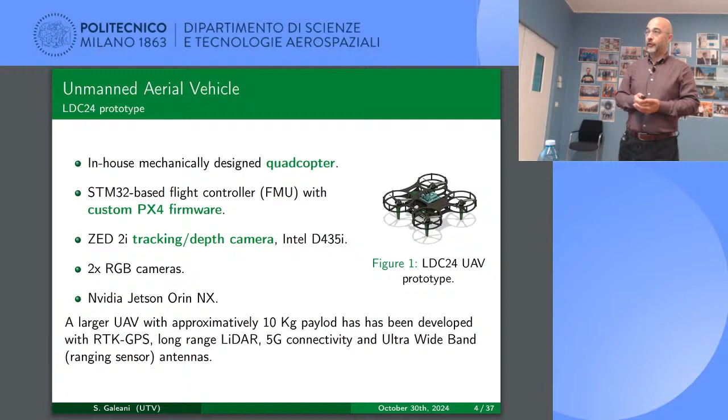One of the big works they've been doing is constructing a distributed architecture - distributed from a software engineering point of view, having several different software agents dealing with stuff, communicating asynchronously with heterogeneous hardware platforms. Part of the work was not just to have this work on a specific set of platforms, but to make it as replicable and modifiable as possible according to your need - the idea of having Docker containers so things were pluggable and unpluggable easily and replicable from machine to machine.

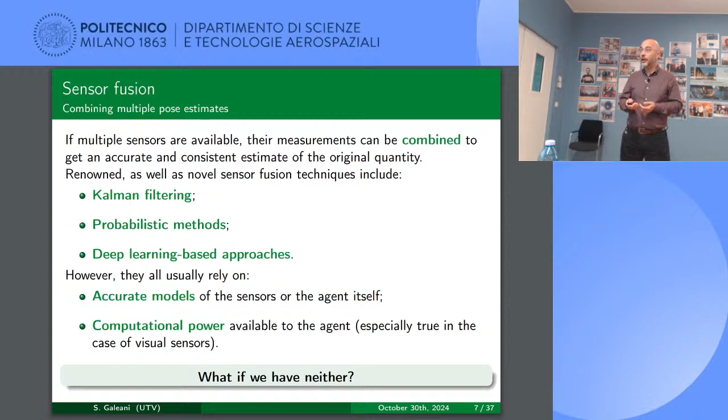And this is especially true in the case of visual sensors, where we have to look for features in the environment, try to combine them, try to contact other agents and see if they see the same features, how to combine the two scenes. So the idea was to work on this hypothesis and try to say what can we do if we don't have this information, or we don't have a reliable version of that information.

So this is one of the algorithms, and I will try to get into the assumptions and the algorithm that they have been using to combine these things. So they are assuming essentially that we have discrete time measures, because we have limited communication, we have visual sensors, for example, that have a low sampling rate because we have to take this image, elaborate the image, and so on. They are assuming to have a certain number of different sensors that we will call S_i.

There is a coordination assumption about the sampling periods, so they are assuming that there is a common sampling period for all sensors, and they are essentially coordinated. So this is one of the versions of the algorithm.

And so for each one of the sensors, they are assuming that there is some measurement done of position, essentially. So at discrete time k, we have a position for sensor i characterized by its position in the x and y coordinates. And we have another piece of information, an on-off value, essentially a small s_i,k. This is telling us if this specific sensor is working or not at time k.

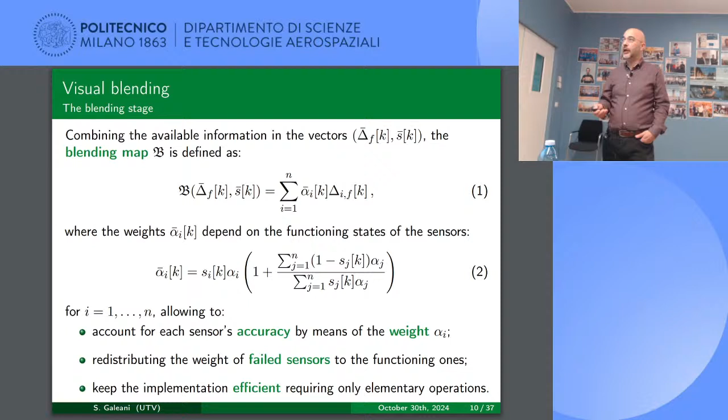So actually in here we have these weights alpha I, which are parameters that can be tuned to account for different things happening. They have an effect on accuracy, so we can change those alpha I to replace one sensor that has failed, giving more importance to the functioning ones. The operations required to compute this are essentially quite basic, so they can be done efficiently on the available hardware.

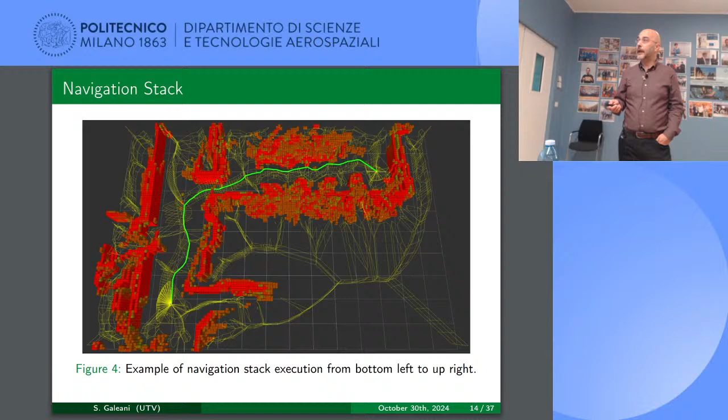The second topic I will talk about is essentially a very punctual thing, just an example of things that have been done, considering that drones are typically affected by several nonlinearities and uncertainty, and we are only able to measure some quantities, not everything described in the drone. Maybe we have a wonderful control law, but we don't have available measurements of all the state variables we need to implement it. So the idea is to try to build an easy estimate of the uncertainty and of the variables of interest. This is also some published work, where the idea is to combine high-gain observers using sample measurements, because that's what we have in a similar scenario, and using interval arithmetic as an additional tool to have a simplified design and to capture the uncertainties on the system.

The basic setting is quite classic: essentially a nonlinear system in observability canonical form, which we assume holds globally. We will see on an example that you can run this algorithm on something that doesn't respect this hypothesis and still get useful information. We have the state xi, this is our system. Phi is essentially subsuming all the nonlinearities, which depends both on state and input. We have, in this case, a scalar input and a scalar output, which is the first output in this chain of integrators. That is the linear part, and then you have the nonlinear part acting on the last state.

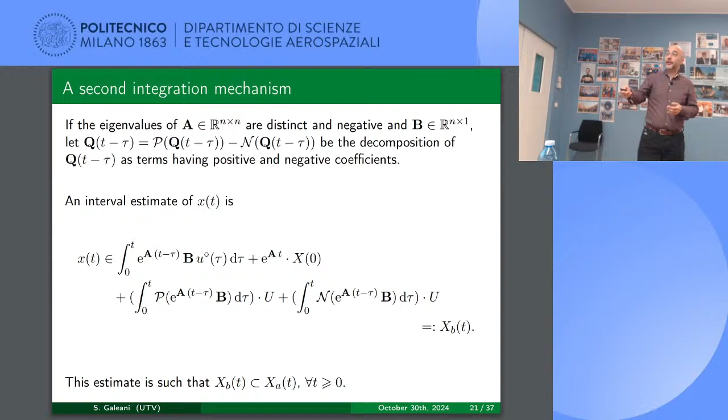And by doing this, you don't have the problem related to the slanting due to the change of variables. This actually gives you an estimate called XB, which is better than the interval estimate you had before. So at least I can finish this and show you one picture, then say one word to conclude.

So how do you build a high gain observer based on these ideas? The way you build the high gain observer here, if you remember, the A matrix was just a chain of integrators. So we are completely disregarding in this design the original description of the nonlinearity phi. I will just use the matrices A, B, and C.

So essentially, this is the formula. If you are familiar with Khalil's approach, the difference here is that you are not using the copy of the nonlinearity. Instead, you assume that your phi function can be bounded by an interval of some sort, and then essentially you propagate things just like this.

If you go here, you can see there is this trick I just showed you using the positive and negative part. There is the propagation of the uncertainty in the initial state, and there is the propagation of this bound on the nonlinearity.

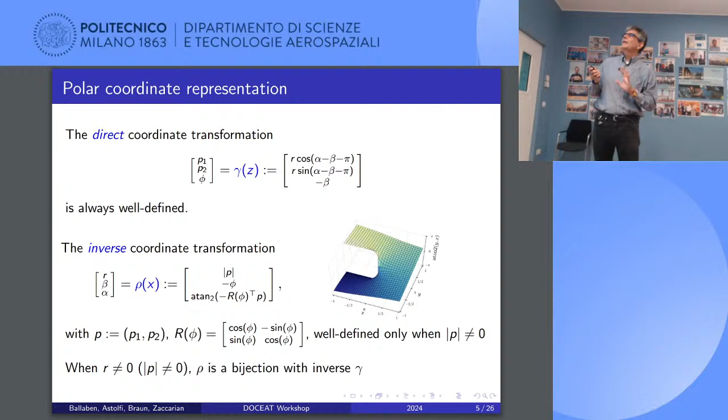So by the way, maybe I should be a bit more clear about the structure of my presentation. I'm going to have a brief introduction first, then I'm going to tell you a couple of issues that are resolved by hybrid, and then if I have time, I will discuss briefly robustness. So let me continue with the brief introduction, which is not so brief.

Okay, so one thing that I'm not going to bother you with calculations, but that you can prove, is that if you take the original dynamics, x dot equals h of x,u, you can actually prove that the derivative of this coordinate z is fairly simple as a function of z. Remember, z is r, alpha, beta, and you see the right-hand side doesn't even depend on beta. Now, I'm using a transformed input v here because it's more convenient, but it's a very simple transformation, okay?

Now, this 1 over r might scare you, but let me remind you that what that means is that if you know how to choose v, which is what's going to happen, then u is very nicely behaved because u1 will be r v1. So what that means is just that u will vanish at the origin. So it's a nice input, okay? Remember, r is the radial distance.

So you can prove all this stuff by doing some simple transformations, with this type of things. Okay, so—

So with these dynamics, I would like to emphasize that you apply Brockett's conditions, these stabilizability conditions, and they do not hold anymore. That means this system is well behaved. So if you look at these dynamics, it is a very nicely behaved system. And so you don't have all those, you know, there doesn't exist a feedback, blah, blah, blah. Actually, there exists a very nice feedback which globally asymptotically stabilizes the origin. It's smooth, it's really nice.

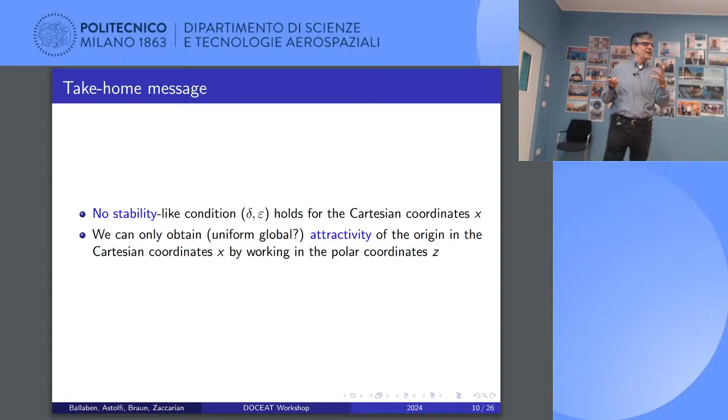Okay, very good. So again, you don't have stability on this output, right? But you do have attractivity. So how can we characterize attractivity? Let me try to explain a couple of things that will lead to hybrid. Now, before characterizing it, I want to tell you something that will lead to one extension.

So if you look at this stabilizer K of Z that I showed you, sometimes it does really stupid things. Like, for example, if this is your target and you're in front of it, what it does is it goes back and then forward and finally parks. But it would make much more sense to just go negative speed and park, right? So why is that happening? It depends on the geometry of the problem.

And so the idea is to use hybrid tools to switch between forward and reverse motion so that this is the behavior obtained from this initial condition. And that's really the big message of this hybrid thing that we do here. So how do we do that?

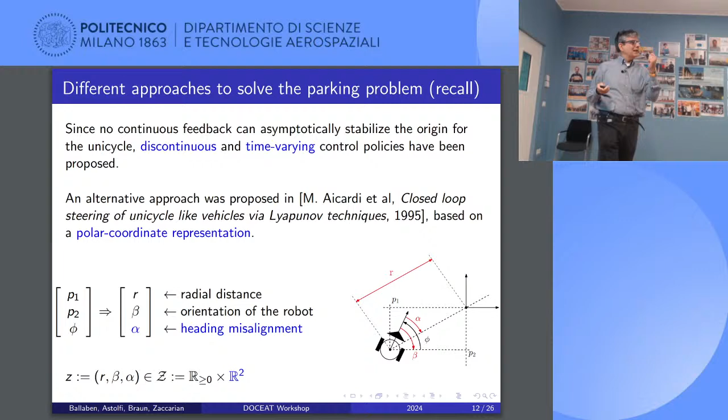Let me go back to a slide that I showed you already, when I defined this coordinate, and remind you that alpha is the heading misalignment. Now, I would like you to think about alpha as a measurement coming from a camera, okay? So imagine you have a camera in front of your robot with a certain field of view, and another camera at the back of the robot with another field of view. And imagine now you choose - there's some overlap in the field of view, okay? This is quantified by a quantity delta that I will introduce shortly.

So imagine that if the target is here, and it's in the field of view of the front camera, you may just go forward and reach this point. But if the robot is here and the target is in the field of view of the backwards camera, you will do reverse motion. So that's the whole idea, okay? And how do we do that?

Okay, so first of all, we duplicate the z coordinates. So we have the front z and the back z. R is the same for all of them, but alpha f and alpha r are slightly different. And now what we can do is redo all the calculations we did before, but with the caveat that the camera is in the back. So there's typically a pi difference in the alpha betas that you can work out pretty easily.

And the interesting thing is that the transformation you need to do from x, the one that was ugly with atan2, now becomes very nice because it involves a difference of sign. It turns out within the field of view of the camera, you completely cut out and throw away the discontinuity of atan2. So we were able to completely pull out of the picture the discontinuous part of this ugly function, and now everything is smooth relative to the domain of existence of these angles. Hopefully this will be clear in a sec.

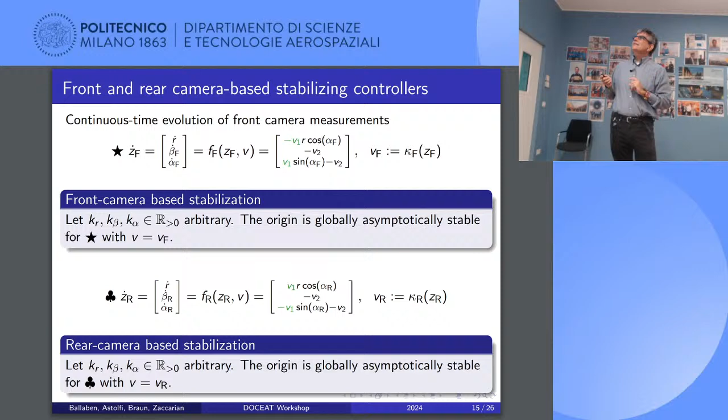Now what we can do is go beyond this and really get to the core achievement of hybrid, which is that the angles are actually limited. So the camera's angles are limited, but also the beta angle is limited, something I haven't discussed so far, and that I would like to discuss now.

You cannot choose a large angle like 100 pi - it means the robot would spin on itself uselessly. So we would really like to restrict the domain in a bounded set, for example like minus pi to pi, slightly larger. And then we will reset these angles when it is time to do so.

This is illustrated here: if you have this orientation, this is a certain beta, but it could also be 2 pi minus beta. So 2 pi jumps are essentially no jumps, but mathematically, we have to implement that.

With respect to alpha, I'll go fast here, but the rough idea is that if you have a certain camera and you reach - alpha will belong to this interval, from minus pi over 2 minus delta to plus pi over 2 plus delta, a bit more than pi over 2. And then when you reach the boundary of this set, you reset.

The way you reset is you have pi jumps when you go to the other camera. So you switch from alpha f to alpha r, front to rear, and vice versa. Does that make sense? It's a very natural jump.

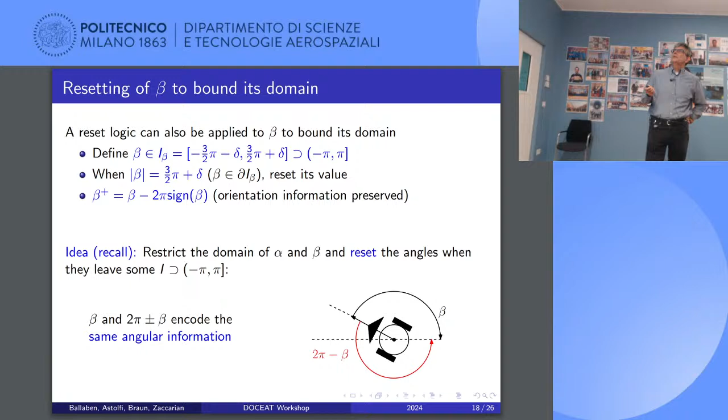It doesn't matter, you can change that, and probably there are ways to extend this. And whenever you reach this boundary, you reset beta. So let me try to put all this together.

To do that, I'm going to do what we do a lot of times with hybrid systems: we introduce a logic variable, which becomes a state. This state is either -1 or 1. 1 means we're using the front camera, -1 means we're using the rear camera.

And then we add q to the state z. But remember that now alpha and beta can be alpha front or alpha rear, depending on what q is. So everything is clean now.

And then the dynamics - it looks ugly, but it's just a collection of what I told you already. You remember the green terms where we had minus or plus v1? Well, we put q, because in one case you have q equals 1, or in the other case q is -1. Then the feedback stabilizer also had a plus minus here that probably I didn't discuss enough, but it's really simple - same type of mechanism.

And then, solutions are not supposed to switch cameras or angles as long as alpha is in its range and beta is in its range. So this set is bounded in the alpha beta direction. And then there are two jump rules, the discrete time evolution of our model, and these are triggered when you reach the boundaries of this set.

So you trigger a jump of alpha when alpha is at the boundary, and when alpha jumps, you switch the camera, and of course you update alpha to the other one. And when there's an orientation reset, that means beta is at the boundary, and so you don't touch the rest, and you just unwind the beta.

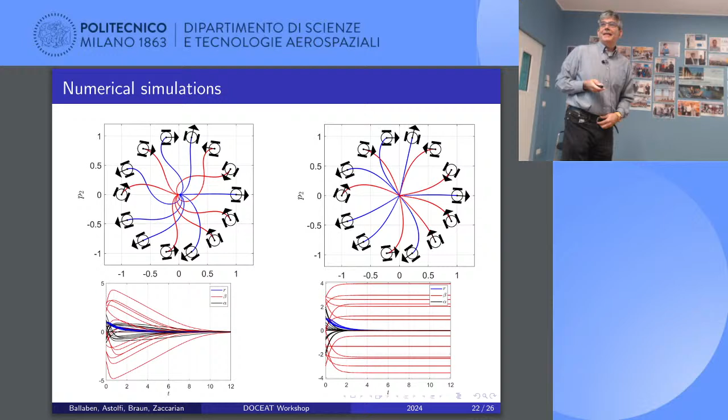Okay, and then I need to be done, right? So I wanted to discuss robustness. Maybe I should tell you that you can prove uniform convergence of the x coordinates.

And I wanted to discuss robustness because that's what you get for free from the smooth selection of the hybrid stabilizer. So everything is super nice and clean if you do it in the z coordinate - you get robustness to very, very large types of variation. You can perturb the right-hand side any way you want. But when you go back to the x coordinates, you keep having this problem of how do I match it up? There are issues, and this slide is very ugly and technical, so I'm just going to skip it.

Also because I'm not sure this is the right way to look at the problem, to think about perturbations of the x dynamics and how I can relate them to my result.

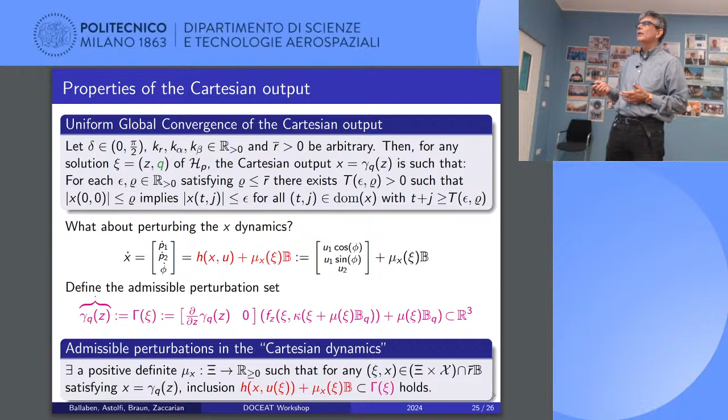So I guess I'm going to just conclude and say that, besides what we did, what are the real coordinates? I can put the cameras on my robot and just say x does not exist, it's just z, right? So then where's Brockett? I don't know. Or should we say something about that? Is it interesting? Or should we just say that the problem is solved in the z coordinates and who cares about x? Just trash all the papers by Astolfi in '95 because they're useless, right?

Or but maybe no, maybe it's important. Maybe it's important to look at the x coordinates because closer and closer to the origin, you cannot spin your steering wheel super fast, right? Maybe that's the issue, and it's a real issue. And then it would be nice to have experimental results with onboard sensors to see what happens. And thanks for your attention.

Okay, sorry for being late.

No, thank you. We have a question from the audience. One, Nicola. I think that everybody can speak. No, okay, we are online.

Okay, sorry. Thank you, Luca, for this nice presentation. So I'm just curious to ask you if the problem of the inversion of the arctan2 function can be solved through the SO2 or SO3 manifold. Instead of, let's say, trying to find the angle, why don't you stay on the matrix? This is a curiosity, clearly. I guess that you've been working on this so long, you know the answer.

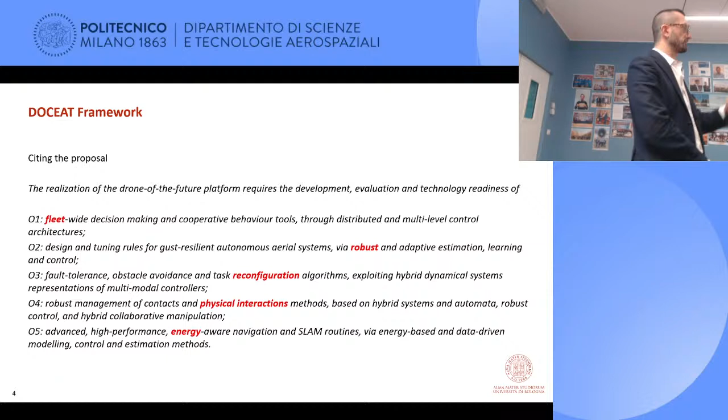So just to aim at what we are doing inside the project, the DOCEAT project, those are the goals we declared in the proposal. They're very ambitious, and what I'd like to mention is that we were looking for the drone of the future platform. So what we want to do is make these things work in reality. Among these objectives, the first one was trying to make a fleet of drones work together to do something. So this work fits into this first objective.

Maybe clearly before they were talking about resistance to faults, to sensors, which is inside one of the topics here, I guess fault tolerance, and so on and so forth. But that's our goal, and in particular we want to exploit drones to do something to help rescuers in avalanche scenarios.

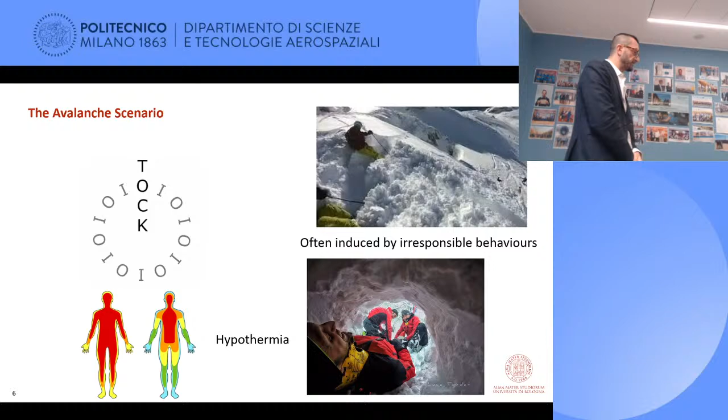As you know, avalanches are a natural phenomenon, but most of the time they are triggered by irresponsible behavior of humans. What happens is that after you get buried by the avalanche, your temperature goes down, and hypothermia comes very fast. If you are lucky and somebody knows you are there, they call the rescuers, who need time to get to the place, organize the rescue operations, and then start. All this takes time. After 15 minutes of burial, you have only about 5% chance of surviving the avalanche.

So that's why we need to be super fast, at least when we get to the place. From that moment, we assume the rescuers are equipped with our fantastic drones, and the drones are trying to help reduce the time to rescue, to find the place of burial. That is our goal. So how can we do that?

Basically, we rely on some technology called ARTVA. ARTVA is like an acronym from Italian, this transceiver, avalanche transceiver. It's made of two elements: a transmitter, which is active, and a receiver. So everybody wears this device in transmitter mode.

And when something happens in the avalanche, the rescuers switch the device into receiver mode. This system propagates an electromagnetic field over the air, and you receive it through your device. What we receive on these devices is actually a couple of pieces of information: the intensity of the field and the direction of the field.

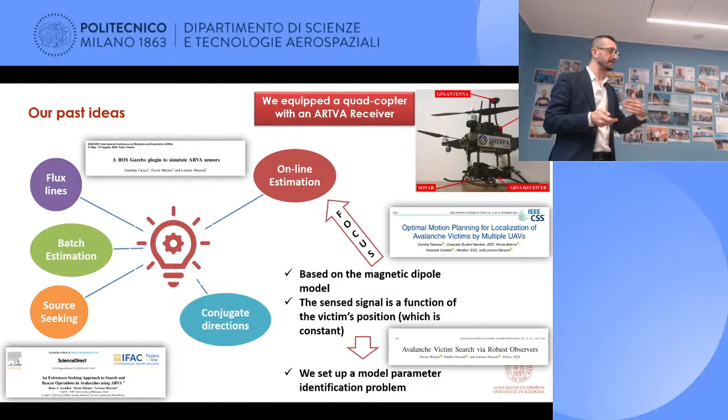In this work, we are still in online estimation, but we are mixing things. In particular, we are mixing source seeking and online estimation. So we are trying to do something better. You'll see in the simulation results that the joint work of these two algorithms can provide better results in terms of reducing time to find the victim of the avalanche.

So that is the problem description. What I think is my scenario: I have one single transmitter, one single person under the avalanche. Then I have several receivers, which are equipping my drones.

And what I can do is move the receivers. Then, possibly, I would like to deploy on this fleet of drones a control law that moves them in order to estimate as fast as I can the location of the victim of the avalanche.

So clearly, as Luca mentioned before, we are also targeting something that doesn't make us explode if we start close, and possibly all the trajectories go in a uniform way. Both the trajectory of the estimator and the trajectories of the drones must converge into an area. So this is where our mixed work comes in.

We decided to mix our approaches. From the University of Padova, they know exactly what is bearing-based target localization. And here in Bologna, we know how to work with ARTVA and how to perform source seeking. So that's why we mixed these two works together.

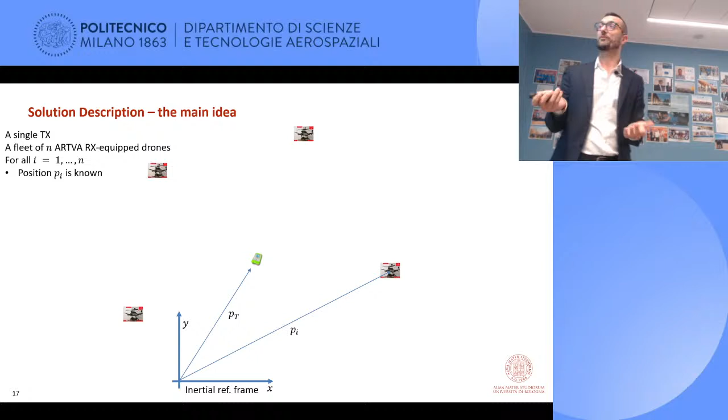So the idea is simple. Let's start with the transmitter located somewhere in the inertial space. This is P of transmitter. And then we have a fleet of drones. I assume that I know where I am with every single RX. And let me define this vector, which is the bearing vector, the direction from me to the transmitter for each of the agents.

So as Giulia and Angelo can teach us, actually the resolution is this. I get the stack of all the directions, and I look for, in my problem, the point that matches all these directions. It's like in this minimization problem, you take this guy, you move it, and you find a position such that all the directions are aligned at the measurement you have. So that is the working principle.

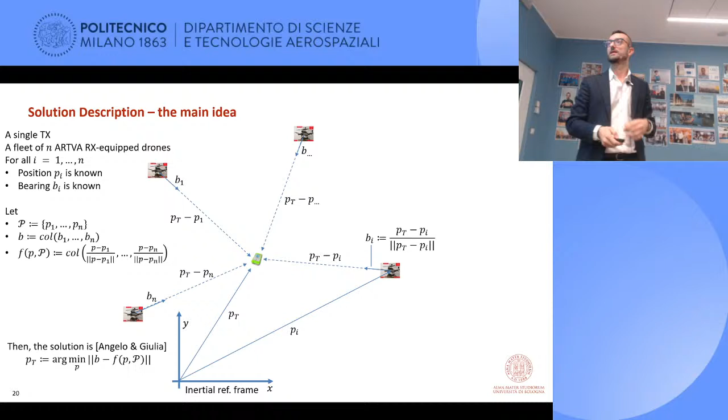So guys, I think that you will not be happy about that. Could you tell me why? Okay, let's see. We have three main issues with this.

The first one is we don't know actually the directions. There's no way for me to know where the transmitter is, so I don't know where is the direction for me to that.

Second, even if we assume we have the bearing, this solution is ill-conditioned. It depends on the scenario. For example, if I am very far from the transmitter, and this happens always, because when the rescuers approach the avalanche site, they go from the bottom, and the avalanche goes from the top. So you start scanning from the bottom like this, and probably the victim is somewhere there. So this scenario in which I have the transmitter far away is absolutely possible. And then what happens is this: though all the directions come very parallel to each other, it's very hard to find a solution to this problem. And probably what happens is that your estimation is quite wrong.

So the third one is that actually there's no way to solve this problem in closed form. We need to solve it numerically, because it's a highly nonlinear problem, and there's no way to find it in a closed form generically. So what we do usually is to approximate this solution in some way.

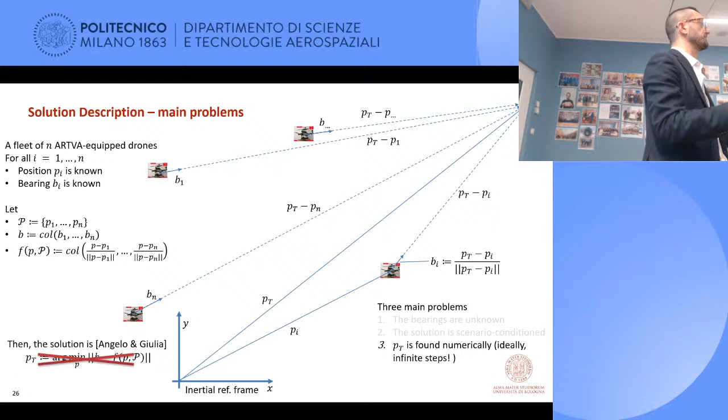So now we need to deal with all these three problems in order to make this system work in reality. Problem one was about the existence of the knowledge of the bearing directions.

So let's assume this is my formation, and this is the transmitter, and the power which is emitted by this has some ISO power lines. So as far as you move away from the transmitter, the power goes down. And usually this happens with, let's say, the inverse of the cube of the distance law. It's quite normal.

And then what I can do is, if I take my position and perturb it like in a circle, what I can do is sense the variation of the power along this circle. So usually I collect data from there, just for graphical analysis, let me assume I know the power at the center of the circle, but actually it's not needed in reality.

So what happens is this: I take this map, I continue sensing the power on the circle, and I have this output over time. This is the output of my power with a bias. And I have here projected my position in space along the circle like this.

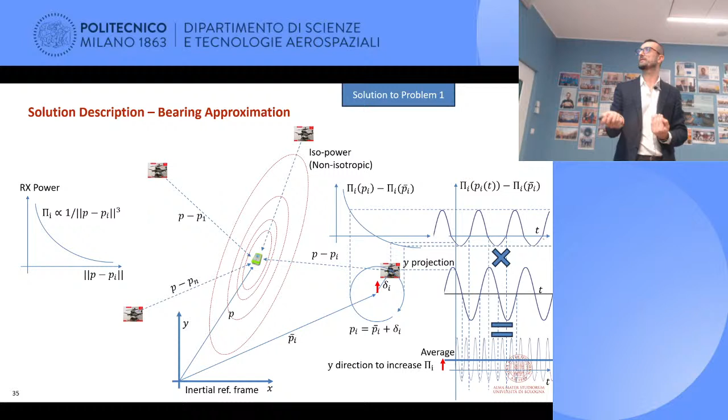So if I multiply these two signals together, for sure they have a synchronization. So the extremum seeking theory tells me that if I take the average of this signal, then this corresponds to the direction along which the power increases. So it means I have to move my system along this direction to increase the power. We can do the same for the x component, the horizontal one, and get a final direction along which I should move my drone in order to increase the power.

So that is the basic of the extremum seeking concept, which is actually what we have done in the past, when I mentioned the method we used. The source seeking. Good.

So clearly the extremum seeking is providing you something which is an approximation of the direction along which the gradient, the power, increases. So we have an extra error in this. And absolutely, guys, this delta I, which is the right gradient, is not related to the bearing at all. It's another measurement. So actually, the best we can do at the moment is to use this estimated delta instead of the bearing we had before. So this is indeed an approximation of our directions.

We can do the same for all the drones, and then we have all these deltas available. Then we use the stack of the deltas inside the original problem and define again the same problem. So what we look for is something which is a friend - it's not exactly the real PT, but it's a friend of that.

So what you can see here is that if I assume the iso power lines are isotropic, meaning circles, all of them will converge to the right PT. So indeed, the shape of the radiation pattern has a big impact on this solution - we can be close or far from the target depending on the shape of this pattern.

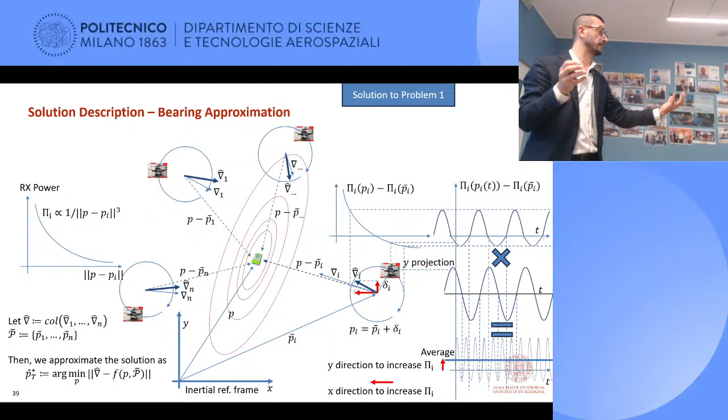So we can do now a second step to make our solution better than before, understanding what happens if my transmitter is very far from us. Let's assume that this is the configuration, and let's assume that the PT is this one. So even if I have an error in that one, possibly what I can do is to exploit this information.

So the victim is... okay, so to move maybe the whole formation. Say I have a formation here, the transmitter is there. What I can do is to get closer.

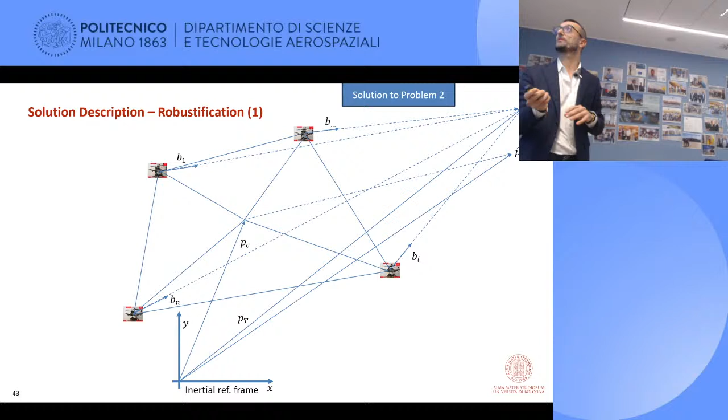Because if I get closer, what happens is this - we move with a certain intensity. And if I get closer, what happens is this: you see all the blue arrows, which is the new bearing of my system, are indeed more orthogonal than before. And then the problem will be more robust.

So if I do this again and again and again, at the end of the day, I will circle, I will surround the target. It's just a matter of time, and I will get there. And once I get there, the bearing direction is so orthogonal that everything works as we expect. So this is the conclusion of that.

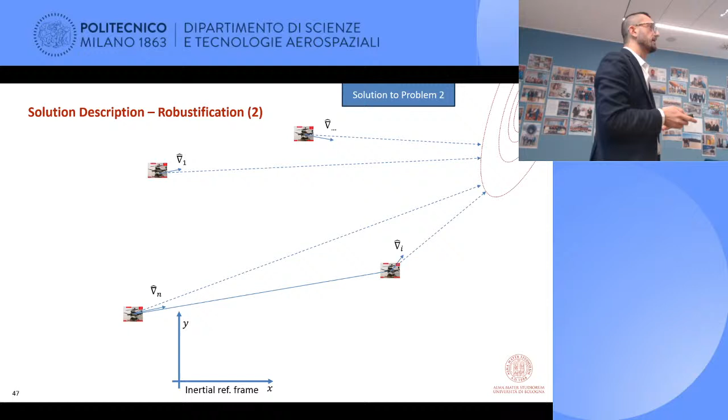But we can also do this once again with another source, which is the extremum seeking source. So indeed, what happened is this: at the beginning, I start seeking for this gradient estimation. Then I use exactly those directions in order to move the formation.

Indeed, what happened is this: I collect these vectors, I just compose them to move the drone fleet, and I get closer to the transmitter. So as you can see, right now I'm getting closer, and the next step will be closer and closer, until, again, I surround the target.

So the question is, why don't we solve the problem by extremum seeking only? It seems that I can do that. Actually, guys, because extremum seeking is very, very slow.

So you need time. You need time to circle and collect the measurement and compute the average. But we need to speed up the search because we don't want people to die. So this approach is... I mean it's a good baseline, but it's too slow. We can't use this only.

So that's why we want to rely instead on the good performance of the estimator of the position in order to speed up the search procedure.

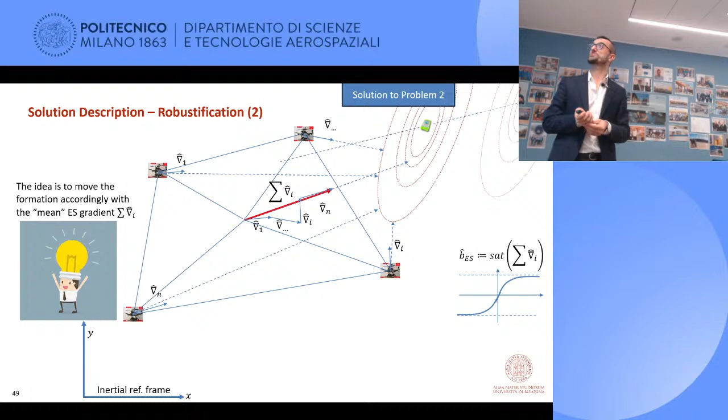But in practice, I can't wait for an infinite number of steps in my computer. Then I have to stop my execution after a certain number of steps. This introduces an error, which we also took into account in our analysis.

So now all the ingredients are ready, and this is our proposal for solving this problem. So let's investigate it step by step.

In the first part of our argument, we have all the agents which are shaking in order to estimate these gradients. Then we collect all the gradients, and we have a central unit collecting these gradients and running this least squares, this recursive estimator with a gradient. After a while, this machinery provides me the estimated PT, and I use this estimated PT to move the formation.

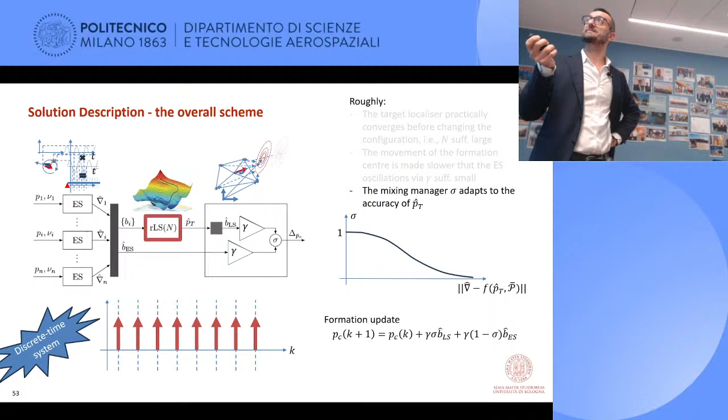First, we decided to implement this as a discrete time system, okay? So something happened, then something else happened. We need to decide which happened when, what happened when. In particular, what we decided is this: this inner element runs at every time step.

At every time step, it updates the estimation of PT. So clearly, at a certain moment, I need to provide the vector of my gradient estimation to the recursive least squares. Then it runs, and meanwhile the formation stays still. It doesn't move for all these time steps. So we have defined a certain interval, capital N, which is the number of steps this estimator can take. After that, we decide to both move the formation and send to the RLS the new update of my gradients.

So the extremum seeking is continuously working, okay? It is continuously estimating the gradient. I have a continuous flux of information from the extremum seeking. These nablas are available at every time step, but I do not use them always. So I shake the drones while I move the formation. In the meanwhile, at any time I change the formation location, I run the recursive least squares. And that is our approach.

So why have we done this? Is there any sense to it? Well, the reason is this: first of all, we need the algorithm to converge somewhere, so the recursive least squares needs to converge to estimate the PT, okay?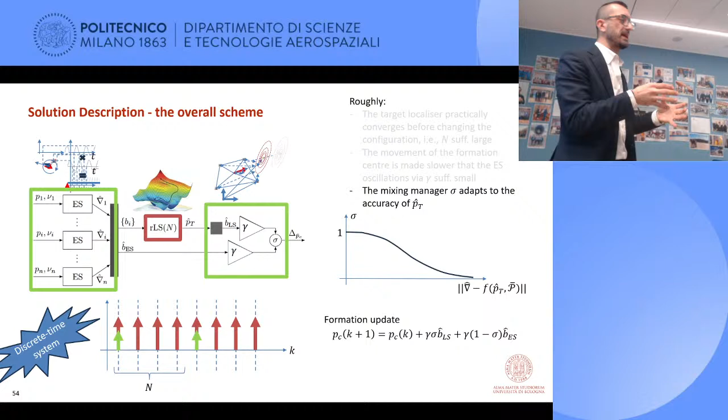We have done this by means of this gamma. Gamma will be designed sufficiently small, in order to let the drone shake sufficiently fast, faster than the movement of the formation, okay? And also n, the number of steps we take before updating the formation, this also needs time to get sufficiently close to the solution.

So this is like a two time-scale separation: one for making the recursive least squares work, the second one to make the extremum seeking work. So gamma small, and n large. That is the design philosophy we have. This has been defined this way because we know from theory that from time-scale separations we have dynamics which are sufficiently good at different time scales. Possibly everything works at the end, okay?

So let me show you the simulation results. At the beginning, let's stay focused on the extremum seeking only, the middle part. So this is like setting my sigma function to stay always at 1. Okay, let me remember.

So I'm using extremum seeking, shaking the agent while moving them according to the direction from the formation, from the extremum seeking only. As you can see, at the end of the day it will probably converge.

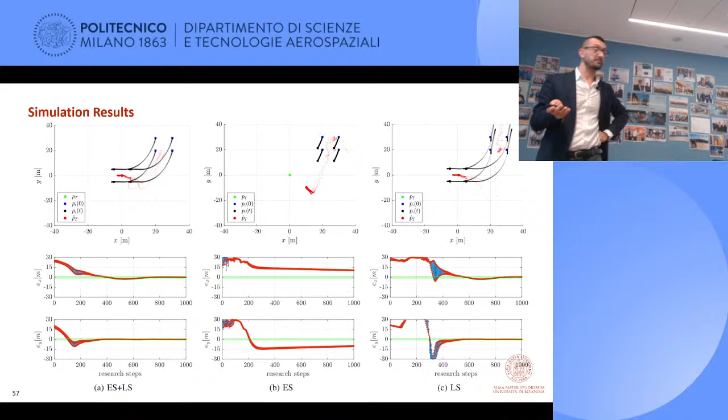Just to conclude, I'd like to recap the main steps we took. First, we started from two elements: on one end extremum seeking, on the other recursive least squares, the estimation made on the bearing. Then we mixed them, and discovered we can take advantage of both through a certain logic based on timescale separation.

So the next step will be, first of all, we need to conclude the proof of stability, which is not ready yet, but don't worry, you will not find it in the CDC paper. And the idea is this one.

Wait a second, okay, the ARTVA one maybe is simpler, too simple a case, and it's simpler than reality. The reality could be that I have any radiation pattern like this one, where I have some directions with zero power.

Differently from the ARTVA one, which was like ellipsoids with power spread everywhere, in this last one there are some directions where I have no power. So when I move my formation, I don't want the drones to stay where there's no power. It's also important now to move the agents relative to each other in order to create a new formation like this, to place the agents in the best locations to estimate the transmitter position.

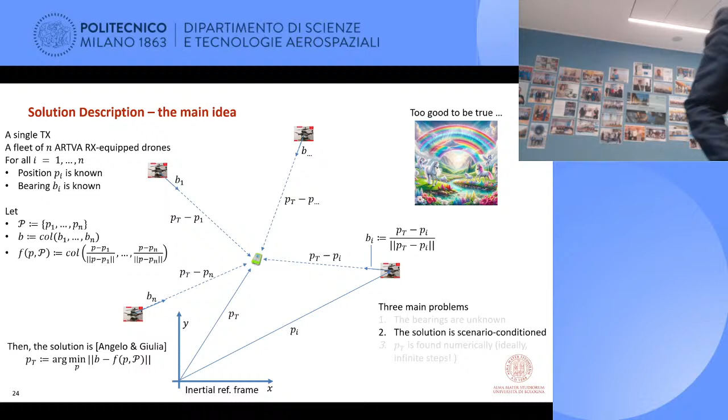Qual è il problema? Okay.

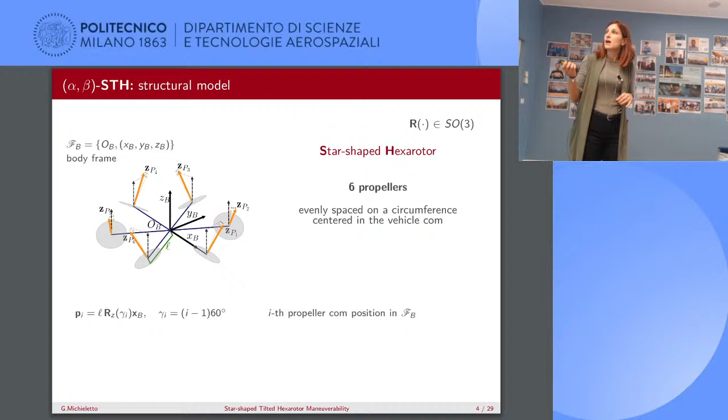Then they are tilted, so they spin around an axis that is not orthogonal to the plane where they are placed, but generically oriented. We made some assumptions, distinguishing between two angles: the cant angle and the dihedral angle. The cant angle, called alpha, is the angle around which we tilt in the direction of the arm, and we assume consecutive propellers are alternately tilted — a couple like this, the consecutive ones like this, and others like this. The other assumption is that the dihedral angle is equal for all propellers, meaning they are all equally tilted inward or outward.

With FB we indicate the body frame, the frame associated with our platform, placed at the center of mass of our platform. Is everything clear right now? Okay, very simple.

As you know, we have an actuation model linked to this platform. Each propeller is able to exert a thrust force, a drag torque, and also a thrust torque. All of these quantities are related to the input, which in our case is the spinning rate of the propeller squared.

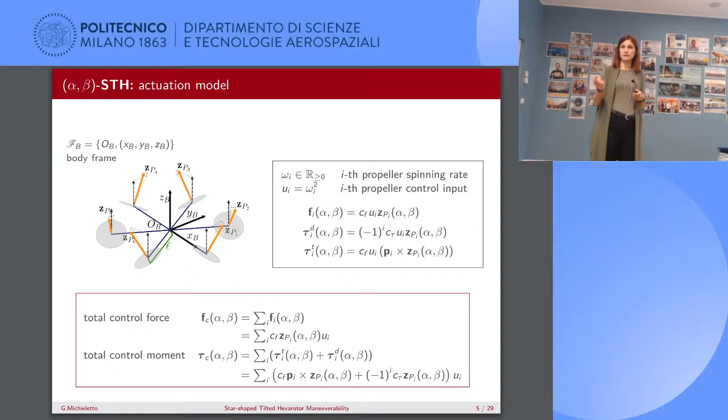Let's move on and introduce a control input vector. We stack all the inputs of our propellers into a single vector, and we assume these are limited because we have physical constraints given by the motor power.

In doing this, we can express our control force and control moment as the product of a matrix and a vector. In particular, we have two important matrices: the control force input matrix and the control torque input matrix, and that depends on the two angles I mentioned before, alpha the cant angle and beta the dihedral angle. Those two matrices are 3 by 6 matrices, so these are rectangular, and each column is related to one of the propellers. So the columns of such matrix depend on the orientation of our propeller.

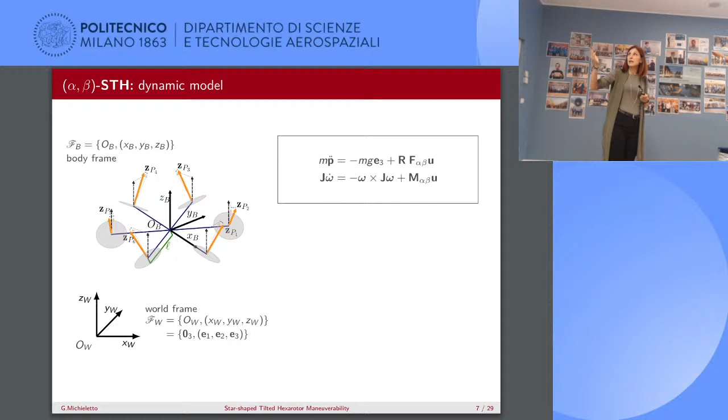Something more: we introduce the world frame, the inertial frame, which is fixed. We can indicate this frame with FW, and we assume that the axis of this frame corresponds to the canonical vectors of the R3 space. We can describe the dynamics of our platform as the standard dynamics of a 3D body in space, so we have the translational equation and the rotational one. The translational dynamics depends on the force, the rotational dynamics depends on the torque. Let's substitute the expression of the force and the torque with the matrix product that we have introduced in the previous slide, and here we are.

In CDC 2019, we presented a paper in which we explored this kind of platform, and specifically we focus on the rank of the F matrix and M matrix. I recall that F is the control force input matrix, and M is the control torque, or control moment, input matrix. The first matrix could have rank equal to 1 if the two angles are equal to 0, meaning that we are accounting for a standard platform with coplanar and collinear rotors. If we tilt our propellers in some direction, the F matrix becomes a full rank matrix, while M is always a full rank matrix, meaning we always have full orientation actuation. The fact that the matrix with both terms, which is actually a 6 by 6 matrix, has full rank equal to 6, tells us that the platform is fully actuated if we pick one of the two angles different from 0.

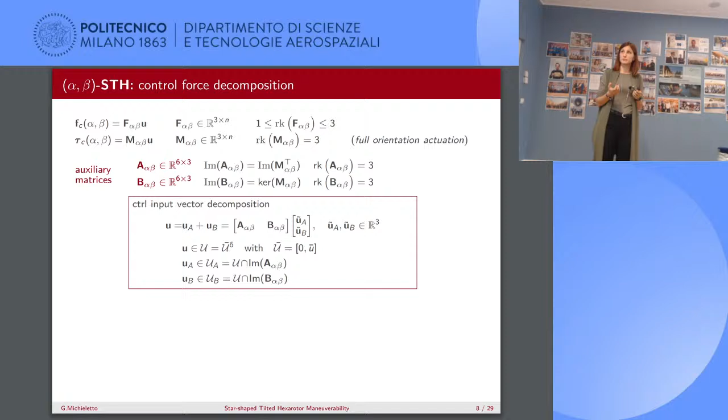As I said, full orientation actuation, while for the force we can have a different situation. Let's introduce two auxiliary matrices. Some mathematical detail, but try to follow me on the reasoning. We have these two auxiliary matrices: the first one corresponds to the image of the transpose of the M matrix, and the second one corresponds to the kernel of the M matrix. So the B matrix describes the kernel of the control input matrix, the input that guarantees us zero moment. The A matrix is such that the spaces generated by the columns of the A and B matrix are actually orthogonal. So we can decompose our control input as the sum of two terms: the first one is UA and the second one is UB, and both of them belong to two different spaces.

But what is interesting is how the decomposition reflects in terms of force. We have a decomposition of the force: the first one, Fa, depends on UA; the second one, Fb, depends on UB. So we can distinguish between three different force spaces. The first one is F, the total space of the control force. Then we have these two spaces here, let's call them Fa and Fb, corresponding to the two components according to this decomposition. Roughly speaking, the first space is the control force space, all the force you can generate with your platform. The second one is what we call spurious control force, because if you generate a moment, you have the emergence of a force, and this force is inside this set. The third one is the most interesting, the zero moment control force, the force that associates to a zero moment, allowing you to have zero moment at the end.

Previous results tell us that a platform is fully decoupled in terms of force and torque, meaning you can apply independently a force and a torque if you pick an angle, alpha and beta, inside our interval. So if the angle is equal to 0, the platform is actually fully decoupled, even if it is not fully actuated. So it could be fully decoupled but not fully actuated. On one side we are talking about the possible movement.

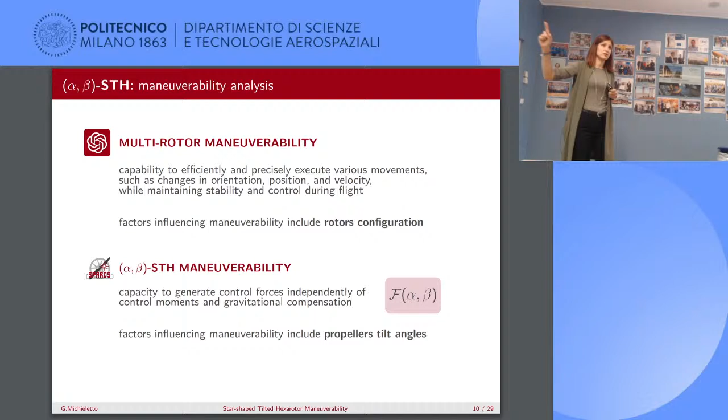So now we focus on this space, the space of the control force. Better, we want to focus on the force independent from the moment, so we focus on the space FB, which is the space of the zero moment control force. As I said, this is given by all the vectors that can be expressed as the product between F and U, which is limited within the space UB. From a geometrical point of view, this space is actually a finite polytope—a three-dimensional shape in the 3D space. Okay, cool.

We can try to explore and investigate this space with a geometric approach. We have taken into account a specific platform, so in this case we have fixed some of the coefficients that you see before in the model, and we can plot the shape of this space varying our angle.

As you can see, if we vary alpha with respect to beta, we have a very different effect. If we have alpha and beta equal to 0, this space is just one direction. If we increase this angle, we have not only a direction but a 3D polytope—so we expand this space. The effect of alpha is really more effective with respect to beta, so the cant angle seems to have a bigger effect compared to the dihedral. The dihedral seems to be quite negligible in this sense.

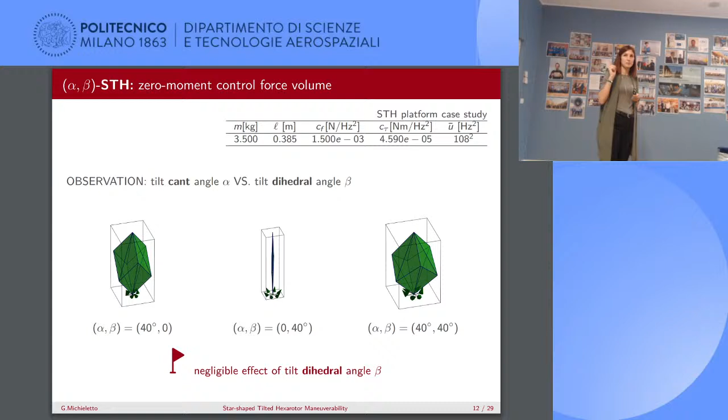And that's why we move to part 2 of the presentation, which focuses on the role of the cant angle. But before that, just a snapshot of the take-home message of this first part: the space of the zero moment control force is represented by a polytope, and the effect of the dihedral angle seems to be quite negligible.

So let's move back to the polytope. Can we use the volume of such polytope as a key performance index to measure the maneuverability of our platform? As I said, let's focus on the cant angle, so we have only alpha, tilting only in the direction of the arm. In this case we can simplify the expression of the force providing zero moment, and specifically introduce this matrix H, a 3x3 matrix, because we can characterize the meaning of the B matrix—its definition corresponds to the kernel of the M matrix.

So it's quite easy to figure out the shape of this polytope, because we can express it by taking into account the combination of the columns of such matrix H and evaluating the variation of such coefficient U within the set U, defining the minimum and maximum spinning rate you can achieve. It's really mathematical stuff right now. In this case we have a finite polytope which is bounded and convex.

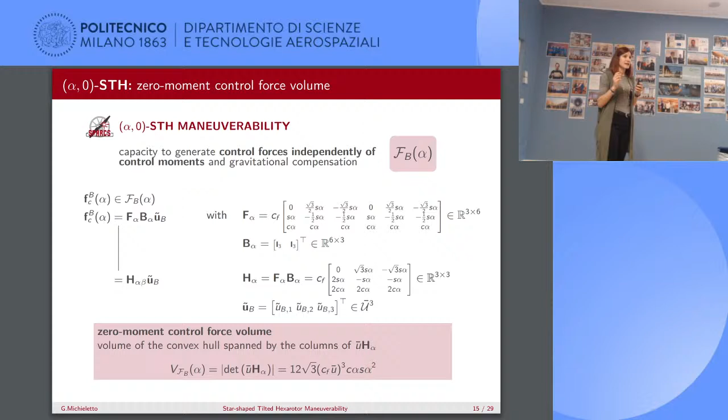And it is possible to measure the volume of this polytope in closed form. The polytope has a specific shape whose boundary corresponds to the direction along which you have the maximum spinning rate of your propeller, while if you vary between the interval from 0 to the maximum, you have all the vectors inside. So we are picking the volume of this polytope.

As you can see, this value varies with respect to alpha, but here we have an issue: two different values of alpha provide us the same value in terms of volume. But the two polytopes are very different in terms of dimensional characteristics—height, width, and depth. Specifically, if we take into account the plane indicating gravitational compensation, in one case we have the intersection between the polytope and the plane, and in the other, no.

So in this second one, we have no force that can compensate the gravity, so we have a problem. We have an issue. We have to choose another performance index.

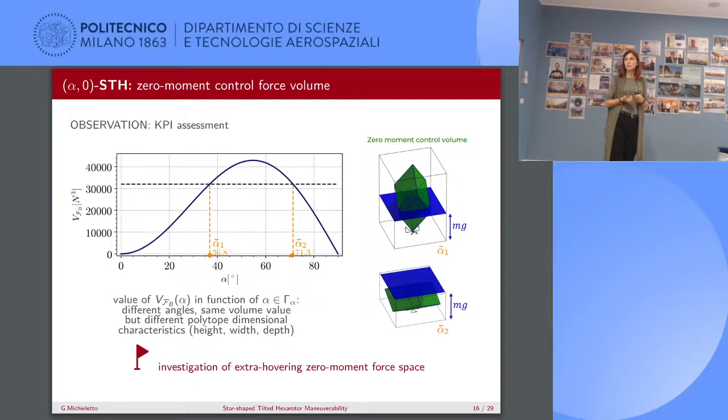So let's try to investigate the extra hovering zero moment force space. We take into account the second aspect I mentioned before, the gravity compensation, and we have to take into account the hovering plane and pick the intersection between the polytope and such hovering plane. Also in this case, we have a mathematical formulation of the vector inside this space.

Specifically, what we want to investigate first, using again a geometric approach, is the area that describes the intersection of such a polytope with a plane.

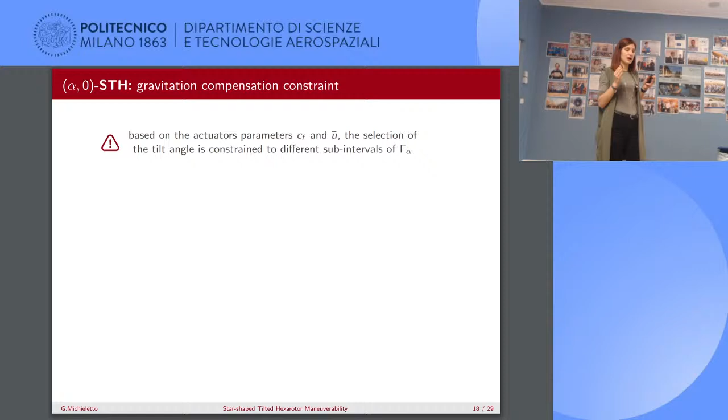Of course, varying the parameter defining the geometrical and aerodynamical property of our propeller, it is possible to define the interval of definition of the alpha angle in sub-intervals.

So we have three different cases. Case A, in which you can use just a pair of propellers to compensate the gravity. Case B, in which you have to use at least two pairs of propellers. And case C, in which you have to use all the propellers. So at least two, at least four, at least six propellers - all the propellers, okay?

And as you can see, we have different situations in terms of intersection between the polytope and the plane. In blue, we have the geometric shape of this intersection. As you can see, in case A and case C, such intersection is a triangle. In case B, it is a hexagon.

How to determine the vertices of this shape - it is necessary to take into account the maximum and minimum force component on the plane, Fx and Fy, so the two components of the force on the x and y plane. We focus on the maximum and minimum, and we can figure out the various points that define the vertices of such a shape.

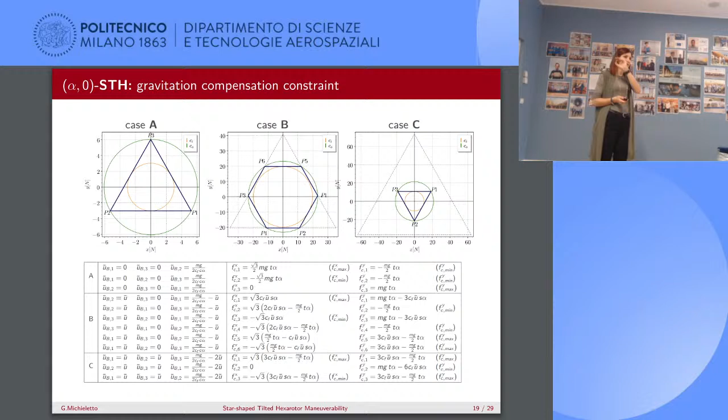On the picture you see also two circles, an orange one and a green one. The orange one is the inner circle, and specifically when we take into account this inner circle, we are taking into account the platform robustness, because we are considering all the space on which you can define the two components of the force having the same magnitude. While if we take into account the outer circle, the green one, we are taking into account the extreme of such force components. So we are taking into account a measure of the aggressiveness of our platform.

Also in this case, we can find out the mathematical expression of this index. I don't want to go into the details, just to give you the idea that it is possible to figure it all out from a mathematical point of view.

Again, we assess these two performance indices. In one case, if we look at the value of the area, we have an asymmetric trend, and the same is also valid for the two radii, the inner and the outer radius.

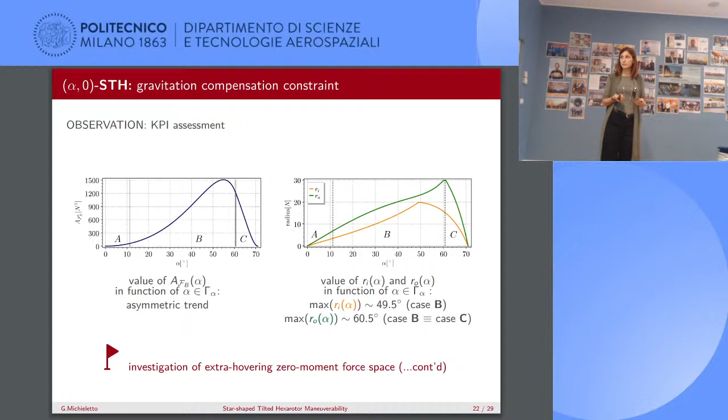So again, let's try to move on and continue our investigation of such an extra hovering zero moment control force. Here the things are more complicated, but again we follow a geometric approach. We take into account the intersection between our original polytope and the half space defined by the plane.

And again, we can have some geometric considerations, taking into account the different points and reasoning in a proper geometric way, and we can figure out a mathematical expression for such an extra hovering control volume.

And this volume is again an asymmetric curve, but now we have several performance indices. We have the volume, we have the area, we have the radii. So what do we have to assess?

Well, the answer is always the same. It depends. It depends on what you are interested in - if you are interested in the aggressiveness, if you are interested in the robustness, if you are interested in ensuring a big extra hovering space.

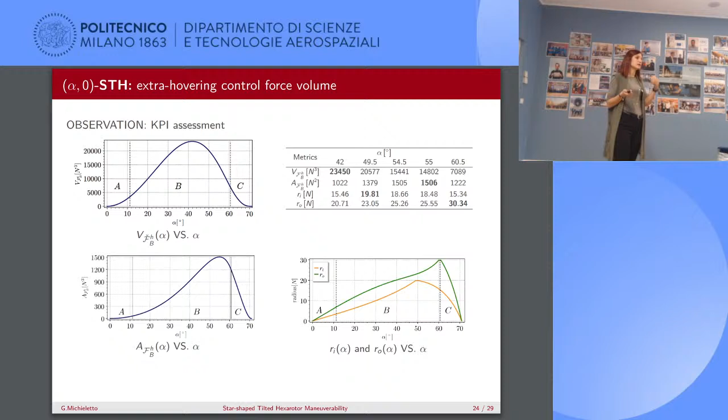So this kind of investigation of maneuverability has two objectives. The first one is to provide some guidelines for designing the platform, so you want to design your platform in order to ensure a certain level of aggressiveness - you can select your angle in this way. The second goal is to assess the performance of existing platforms. So we have this double aspect.

Take away this message: the volume of the polytope itself is not a good performance index.

There exist multiple good enough performance indices that depend on the alpha selection and on the application case. There could exist other performance indices that are better. The answer could be yes, we have to investigate it. It's still an ongoing work.

Before the conclusion, second part, super short, just one slide about the dihedral angle. It is not so effective in terms of polytope volume, but it is necessary for something, and the answer is yes, because it is related to the robustness of our platform, defined in terms of capability to realize static hovering, staying in a precise position with fixed orientation, null angular and linear velocity, even if one or more propellers stop spinning.

So we have the complete loss of a propeller. What we find is that a standard coplanar hexarotor is not robust at all. A hexarotor tilted using the cant angle is also not robust at all. But if we tilt using the dihedral angle, our platform is fully robust to the loss of one propeller, so if you lose one of the propellers, it is still able to fly.

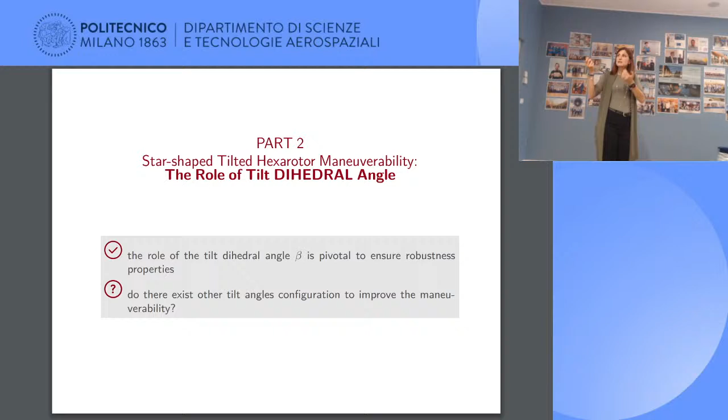But here the question is, does there exist some other configuration of the angles that can improve maneuverability? At the beginning we made a strong assumption that we tilt all the propellers inwards or outward with the same angle. Can we have different angles for the different propellers and in some way provide more maneuverability? Again, this is ongoing work.

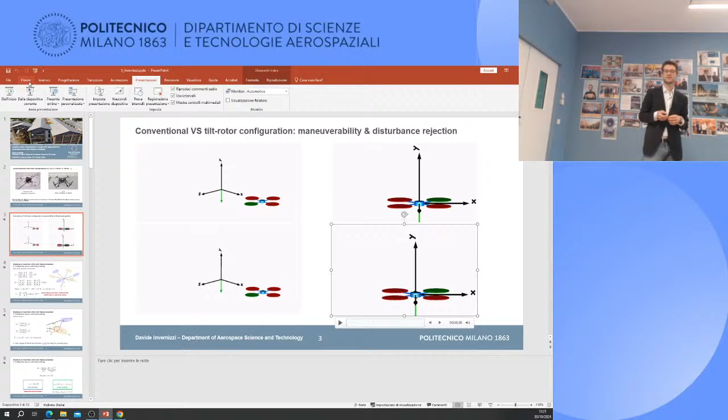Mathematical details behind the modeling of these systems. I see some of my students in the room, so they know some of this. So, okay, you have a recap here. How do we model the configuration space for a system like this? Clearly now we have a multi-body system, because we have a number of propellers attached to a central rigid body.

The first thing we want to do is control the orientation and position of a frame attached to a point within the airframe of the system. What you can do is take a position and then the orientation. One nice way of looking at the orientation problem is to consider directly rotation matrices instead of Euler angles. This is because the kind of models you derive can be described uniquely and globally with this representation.

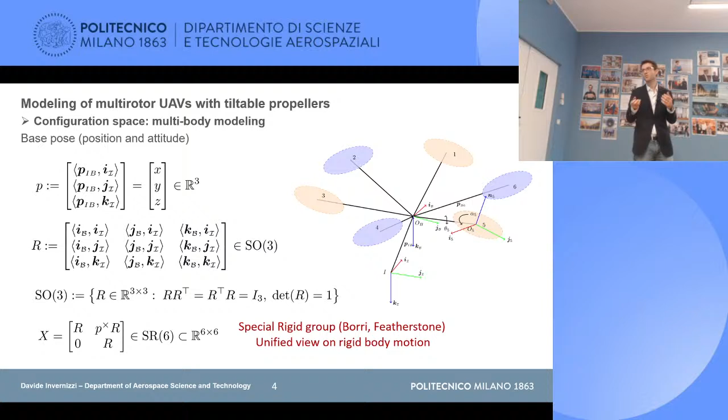You can do even more with this specific machine, in which you can control the full 6 degrees of freedom for this platform, by unifying attitude and position all together. In this department, they were working a lot on this kind of representation of the motion of a rigid body, Professor Borri. In this way, you get the chance to treat attitude and position in a unique way, and that's very convenient, as we will see later.

Now, this is just part of the description. We have the propellers that can be tilted. The first thing you want to describe is the tilting, and I'm using N to denote the thrust axis, the axis through which thrust is produced by the propeller. We can change the direction of the thrust axis by playing with the tilt angle, which I called theta here. Of course, to fully characterize the description, we also need an angle for the spinning of the propellers, but this is not so important, because typically you assume these are like disks, so you lose the dependency in the equation on this variable.

So one important thing I want to highlight immediately is that by actively changing the thrust axis direction, we can change the direction of the force produced in the airframe.

Now let's do a recap on the configuration space. We have our multi-body system, and the manifold we use to describe the configuration is this one. If you're familiar with differential geometry, they call the motion of the frame the base, and what's on top of it, the relative motion, is the shape. So we've got base variables and shape variables. This is a 6 plus 2 times n dimensional manifold. So clearly when we use a 6 by 6 matrix to describe the frame motion, we have a redundant parameterization.

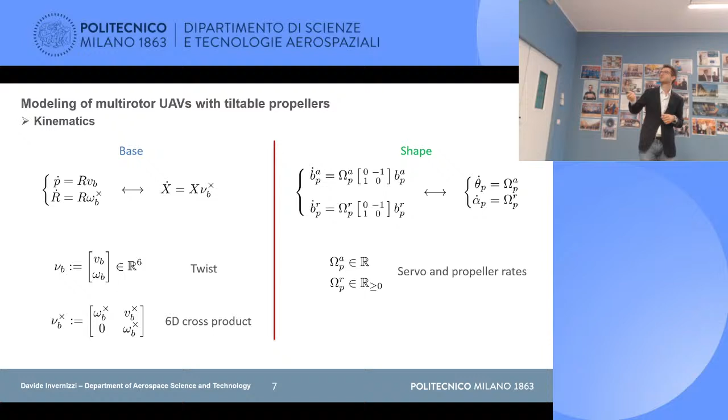This is called twist in the literature. For the shape, well, if you want to confuse the audience, you use attitude vectors, two-dimensional vectors to describe a rotation. Well, let's stick to angles.

That's maybe clearer. Also let me highlight that, as Giulia was saying before, propellers spin in just one direction typically. So I just want to highlight that the spinning rate for the propeller is fixed.

Okay, we got the description of the kinematics. Let's see now how we can describe the dynamics of the system, where the applied thrusts are modifying the behavior of the system.

These are Newton-Euler equations, where what I'm highlighting here is the dependency of the generalized mass matrix on the shape variable. This is just a mathematical representation of the fact that if you tilt the arms and the propellers, you will get a different inertia and static moment with respect to the body frame. What about the applied wrench?

Well, it's a combination of different terms. We have for sure gravity, that notice depends on the attitude, because we are looking at things from the body frame. We have Coriolis centrifugal terms that I'm conveniently not showing here because the expression is really complex. And finally, at least for this slide, we have aerodynamics, WA.

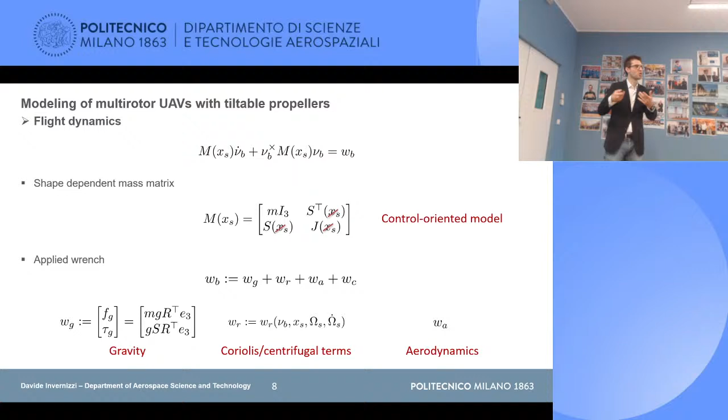First of all, the shape dependency is not really important. I mean, if you have a configuration in which the tilting is done through principal axes and the arms are symmetric, and the mass of the propeller is not that large, you can really remove it when you're trying to come up with a model that is control-oriented.

At the same time, this depends on the inertia. You use those in order to control a spacecraft. Here, they are just disturbances, so you take care of them.

And then there is the aerodynamics. That is a question mark, in the sense that modeling it is really not my job, and it's complicated. You have to think about that. You have propellers that are tilting and interacting with the air. How can we come up with a reasonable model to characterize the dependency on the variables here?

Indeed, what you can do at best, and this is what we have seen also in the literature, is to take for small speed a linear damping dependency on the twist.

Okay, I talked about the three main ingredients for the applied wrench. Now let's move to the actual variable that allows us to control the motion of these systems.

This is nothing but the sum of forces along the thrust axis direction. And then for the torque, what you have to do is to transport the force with respect to the base center, and then add the pure torque related to the spinning of the propellers.

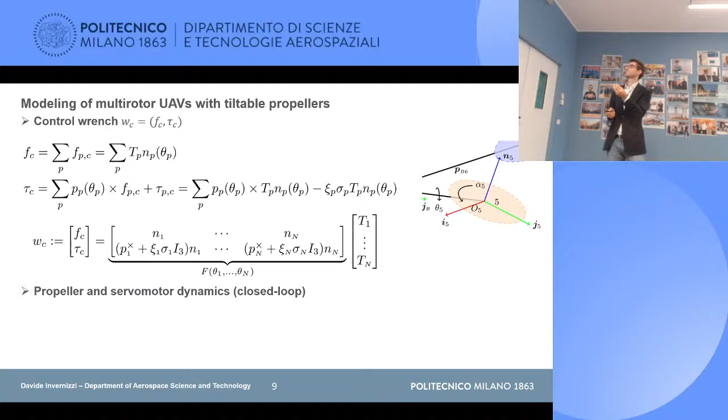Now, there's another thing I didn't talk about: we have propellers with motors, and servo actuators to change the tilting. What about their dynamics? We're totally neglecting that. Based on my experience, a first order model is sufficiently accurate in the flight condition we're considering. So we have the full simulation model as a cascade, in which we have access as control variables to the thrusts we can command to the motors, and the tilt angles. These are our actual physical inputs, which are transformed through the wrench map to the applied control signal that goes into the flight dynamics.

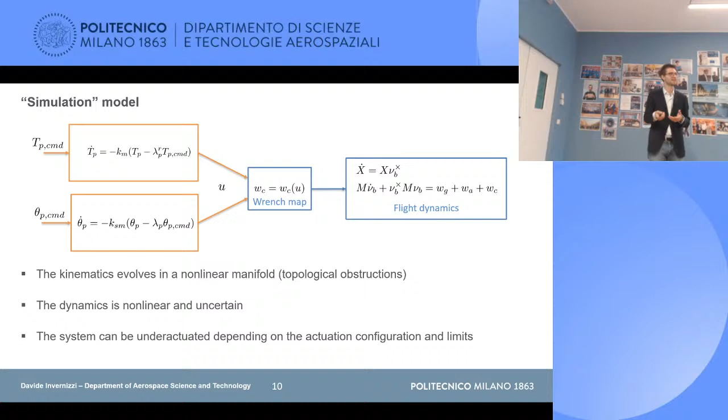Now let me comment on what we just derived. We have a system whose kinematics evolves in a nonlinear manifold, and as we saw this morning, there are topological obstructions we might have to deal with in control. On the other hand, the dynamics—the second equation—evolves in a linear manifold, but it's nonlinear and uncertain, so you have parametric uncertainty and disturbances appearing. Finally, the system can be underactuated depending on the actuation configuration and the limits on the tilting of the actuators. A nice control problem.

Now, how do we approach control design for motion control for a system like this, where you have some guidance function providing your high-level goals? We have overactuation somehow: 4N servo motors and propellers, and a system that is nonlinear.

One could think about going through a holistic approach like MPC, putting in the constraints you have and your nonlinear dynamics, and trying to control the system as a whole. That's an approach I'm not familiar with, and you also have to take into account that you have a prototype built with effort—testing something completely new out of the box is dangerous. At the same time, you know there are control structures that work well for this kind of system, so it's maybe better to start from something you know and then improve on it.

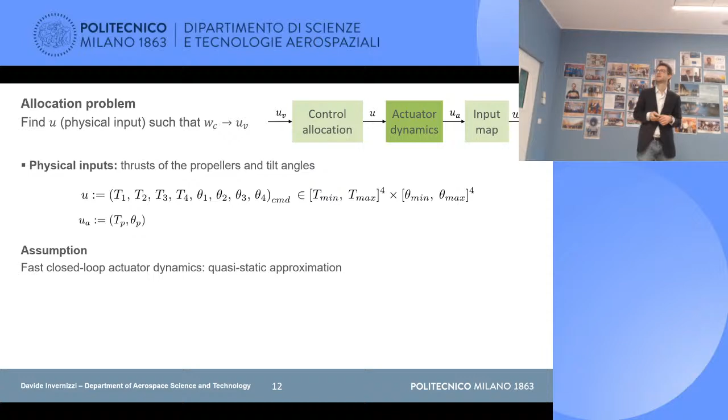The typical assumption in deriving a control allocation block is that actuators are fast enough, so you have a quasi-static approximation of the control action produced by the actuator. The wrench map then becomes just a function of the command variable—you remove the actuator dynamics from the picture, at least at this stage. Note that the imperfect allocation from this assumption can be somehow mitigated at the motion control level, by taking this into account in the higher variables.

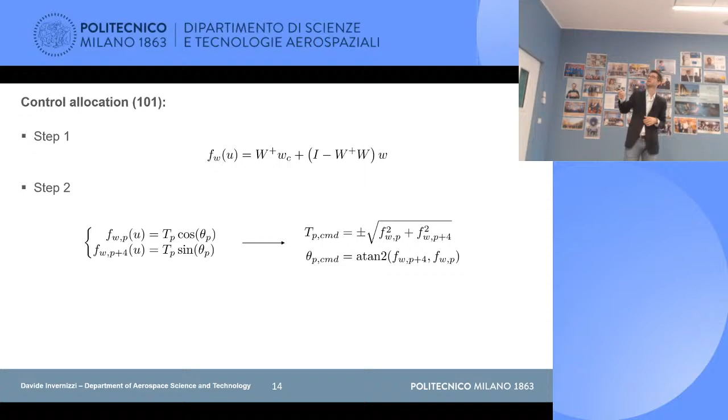So let me show you a basic 101 allocation strategy. Well, pseudo-inverse does the job here. We have our W matrix that can be pseudo-inverted. We compute f_w(u) that collects the component of the thrust along the Z and X axis. Once you retrieve this from the pseudo-inverse, you can compute, using the ATAN2 function, the angle and the thrust you have to command, given the applied wrench you want to apply to the platform.

Clearly here we have two solutions - you might want to take just the feasible one. We have unidirectional spinning propellers, so the positive direction. And note that we have an indeterminate system when the thrust t is actually equal to 0. This is called kinematic singularity in the robotic community.

We are not assuming to be in that condition, so let's say our flight envelope does not go into that region. That's quite reasonable for the machine we have. So we can safely say that the virtual input we can assign to the system spans R6, provided some bounds. We have a squared system if the output is taken as the configuration of the rigid body corresponding to the UAV.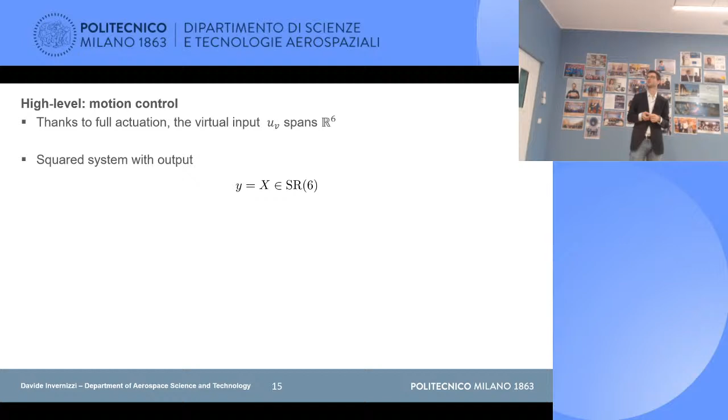This means that generic pose tasks like solving trajectory tracking can be done. So let's say we are given a differentiable curve in SR6, then we can invert the system and compute the open loop input that will provide that motion. Okay, so thanks to full actuation, we can achieve this.

Now let's see how we can come up with a control law that is robust not just to modeling errors, but also to initial conditions. In order to derive the motion controller, what we want to do is exploit one more time the hierarchy in the model. We have a cascade structure here, because the physical input, the virtual input UV, modifies the behavior of the twist, and the twist can be used to control the actual pose of the system.

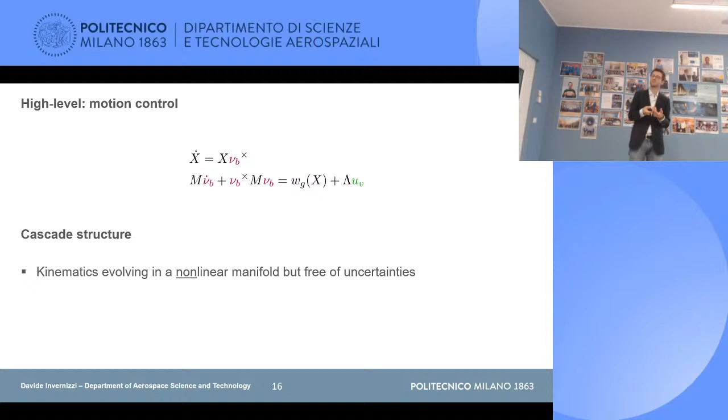Let me highlight that this approach is good for us because we have kinematics evolving in nonlinear manifolds - that's a messy problem from a control point of view, but it is free of uncertainty. The dynamics evolves in a linear manifold, but is affected by uncertainty and perturbation. So let's take the perspective of an inner-outer loop control design. This is the scheme we'll show: the dynamics in the innermost loop controlled by a dynamic controller that tries to counteract the effect of uncertainty and disturbances, and then something that takes care of the messy kinematics we have.

Let me start discussing first the outer loop. This is where we have our high-level goals.

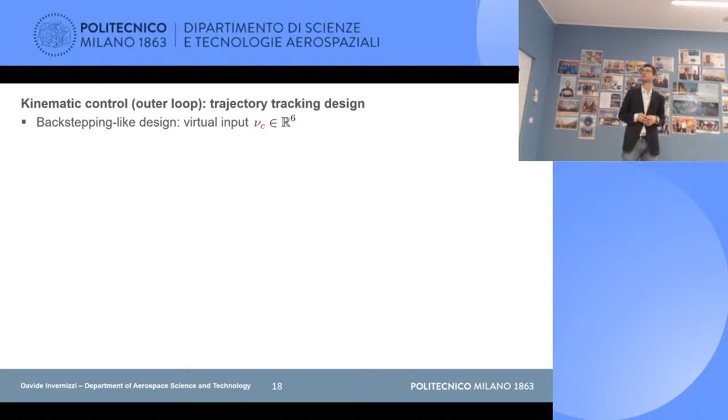We have the virtual input, nu C, the twist, that we introduce in a backstepping-like design to the equation, so that we have a mismatch between the actual twist and the commanded twist. The problem we want to solve is: when we assume the error of this mismatch is 0, let's try to find the twist that will ensure tracking.

Can we achieve a global result? I didn't place an initial condition here. Well, this depends on the kind of flexibility you give to your design. If you stick to a continuous time-invariant controller, no matter what, you cannot find a global solution, precisely because of topological obstructions that were discussed before.

Now, we have a tracking problem, so let's define tracking errors. With the configuration variable I'm using, they are written in matrix form, so the final expression for the tracking error dynamics is the one you see here on the right. Let me highlight that this specific selection is invariant with respect to changes in the inertial frame, so if you have measurements that are only relative, this is good for your design.

Let's now try to provide a structure for a control law to achieve our goal. We have a kinematic system, so let's use the simplest approach: a static feedback with feed forward. We need the feed forward to take care of the desired velocity that we have here.

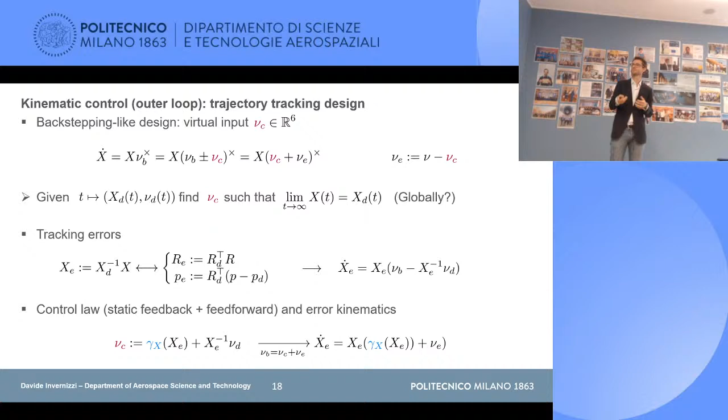In that way, the kinematics will evolve according to this perturbed equation, where in blue you see highlighted the stabilizer, and we have freedom in selecting the stabilizer, provided that it gives us stabilizing properties and robustness properties with respect to the perturbation.

The simplest approach I'm reporting is based on a negative gradient feedback, based on using a Lyapunov design using this function. Sorry, I'm late, I jumped the details. This is widely used in the field. The gradient has this shape.

The issue is that this is a continuous stabilizer. So if you evaluate it at 0, you discover that you don't have just one equilibrium point created in your system. You have 3 additional equilibria corresponding to 180 degree rotations. That's why you really cannot achieve global results with this design.

What you can do is achieve an almost global stability result, which means that the set of initial conditions that will bring you to the unwanted, undesired equilibrium points is of measure zero in the state space.

Then we can do something more. Since we have a Lyapunov design, we can show uniform ultimate boundedness of solutions for this system. Thank you, David Angeli and Praly, for this result on almost input-to-state stability. So we have robustness as well to zero gas, so zero asymptotic, global asymptotic, almost global asymptotic stability with zero inputs.

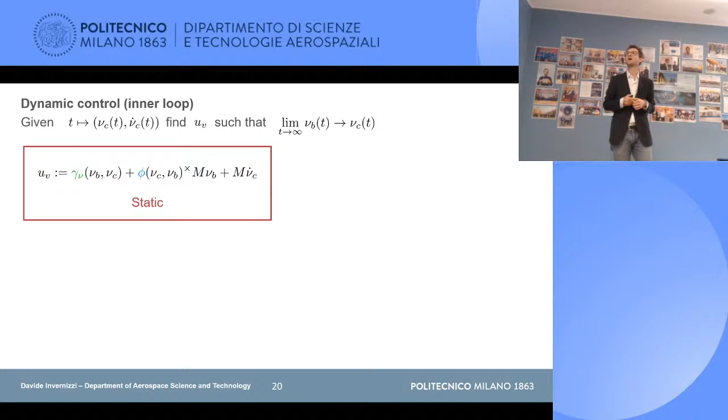Now, for the inner loop, the design is simpler at this point because we have a linear manifold. UV can be selected according to a static design, parameterized in terms of this gamma nu, shown here in green. I'm not as good as Luca with colors, sorry for this. This is a static feedback stabilizer.

But let's say you have perturbation. So maybe here the generality you have to include is to consider also a dynamic state, so a controller state.

What about the closed loop error analysis? With Luca and Marco, we had some fun last year studying the cascade resulting from this design, in which we have the inner loop dynamics perturbing the kinematics in this form. If you are good enough in providing good selections for the stabilizers, then you can achieve a globally asymptotically stable behavior for the upper subsystem, and then you have almost ISS thanks to the previous results for the kinematics.

And then again, there's a theorem here that you have GAS and almost ISS, and this provides almost global asymptotic stability of the cascade.

Now let me make a comment on the 'almost'. So what I said is, okay, basically the chance of converging to the undesired equilibrium is null. But is it good when I have to test it on a real machine, or will I get in trouble? Well, let me say a few things.

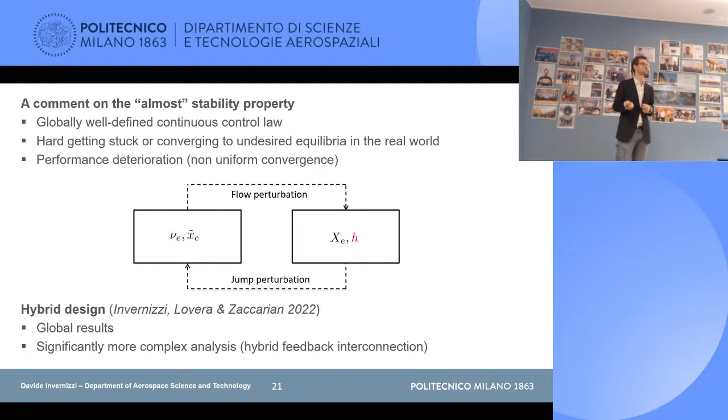In that case, we recover global results and uniformity, which is good. But we have a significantly more complex analysis that must be done, because now we don't have a cascade or pseudo-cascade as in the continuous case. We have this hybrid feedback in which the flow perturbation goes in one direction and the jump perturbation in the other. The difference compared to before is that now we have to rely on Lyapunov tools to achieve the final result. Instead, before, everything was relying on structural properties of the control system.

Okay, so I'm late, I guess. I got... no, I didn't talk about adaptive control. Oh, oops. Okay, baseline control design — let's pick a selection for the structures I've shown before.

You can prove that the inner loop actually behaves like a proportional controller. So with our simple design, we are able to replicate something that we know will fly. And this is ensured when testing your prototype.

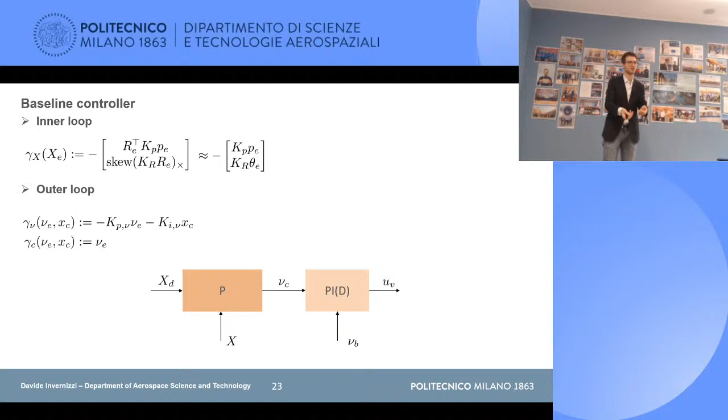So let's see. Okay, we don't have time for the video. It won't go, I guess. Okay, let's keep it.

This is because when you place the battery, maybe you're not very accurate in positioning it behind the drone, and then you have a moment appearing. With this machine, you can keep hovering while tilting, and you see a disturbance on the yaw axis due to this mismatch between the center of mass and the geometric center.

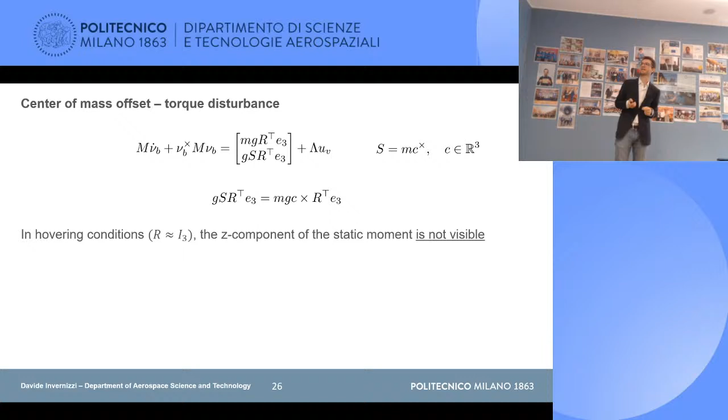Note that with integral control, you actually cannot solve the problem definitively, because the third component of this torque depends on the attitude. So when you're hovering, you just see the other two components, and the integral states will react only to that component.

Okay, let's go very fast on this. Given the model for the attitude dynamics, we can derive a model in a form suitable for adaptive control, by creating a standard linear-in-parameters form for the part related to the static moment.

Standard setup for MRAC design: we have a plant, we have a controller. We create a reference model based on the plant and controller design that were made under nominal conditions, disregarding the effects of the static moment uncertainty.

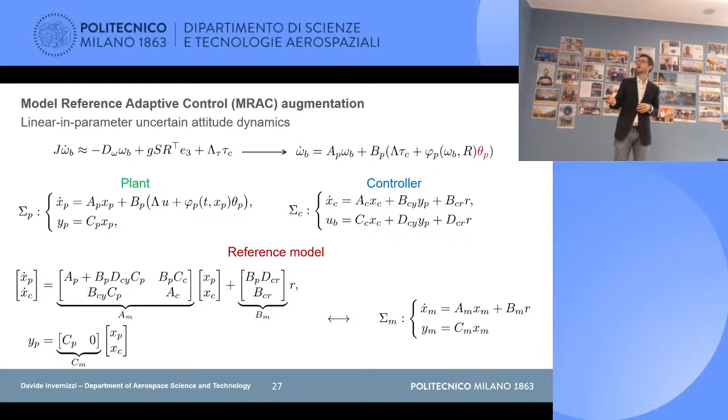This is called the augmentation problem. It was addressed by Lavretsky several years ago in this form, where you try to find a control input that acts on top of the baseline. This is nice — it's a plugin feature that you want when testing something really new.

And these are what you ask your designer — the basic stuff you can get from a standard MRAC design: boundedness of forward solutions, and the reference model error converging to zero.

What we tried to address recently is the plant augmentation problem, in which you don't want to embed within the adaptive design the states of the controller, so that you don't need information that maybe you don't have access to.

And again, you want to achieve the same goals. Is this solvable? Well, we have an incoming paper at CDC as well, about this design, so I don't have time to go really through it, but it's a predictor-based adaptive design.

What I want to highlight is the structure. You have the baseline controller at the plant. The only connection between the adaptive laws and the baseline controller is the output of the baseline controller. This is similar to the compensator design in anti-windup, where you want to add the adaptive component just when you have a mismatch with the intended behavior.

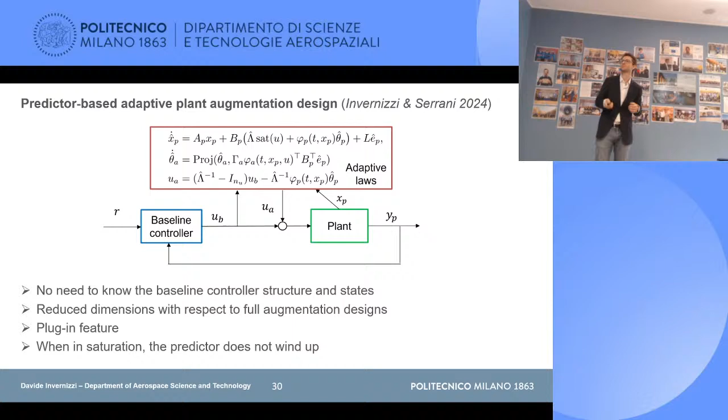This is where I'd show you why it works, but it would take some time, so I guess you can find it in the paper, which is on the letter. But just this, we have a cascade that we can rely on for the stability analysis. Here you have a standard system that you would get from an MRAC design, with boundedness of the prediction errors, convergence to 0 of the prediction error for the state, and then the perturbation on this modified reference model error. And that's the theorem, which you can read in the paper.

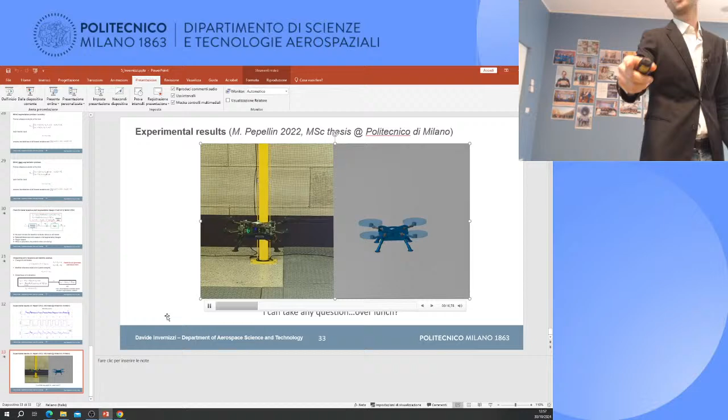Your Lyapunov function on slide 19, as a matter of fact. Can you go? You lose the video, sorry. I put numbers at the end. I know that I didn't have to do that, so Astolfi wouldn't ask me a question. Okay, slide 19.

Yeah, so the trace, how do you know it's possible? I just don't understand. Yeah, of course, you need some constraints on the gain scale. So thanks for spotting it. But yeah, so the design would require to have actually the trace of K, identity minus K, greater than 0. This would give locally a function that is quadratic and positive definite. There are constraints, yeah definitely. So it's not just a symmetric positive definite function.

Okay. Okay, I told you. Thank you. Sorry for the speaker again. Thank you. Okay, thank everybody for.